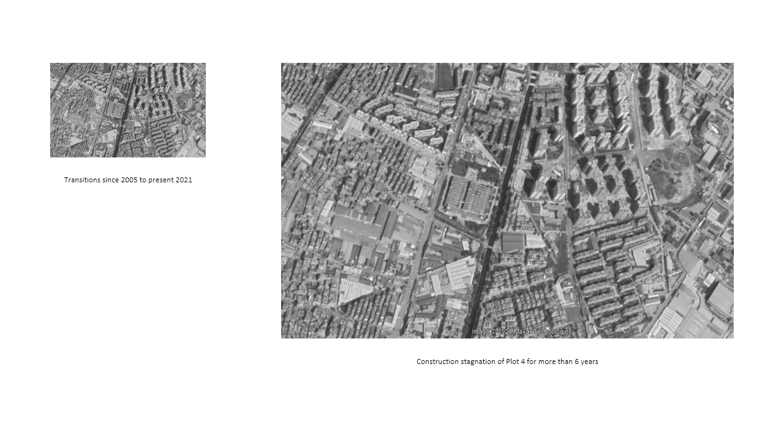The construction has stopped since 2015, and the towers remain the same. A dream had turned into a nightmare. The unfortunate stagnation of construction resulted with this building staying in an unfinished state for 6 long years, until in 2020 a number of desperate house owners decided to move into the unfinished floors and start living. And this unexpected situation created stories to tell. With 100 people came 100 stories.

These unfortunate people have spent in some cases all of their life capital savings into acquiring a small unit in the towers, only to be living like an urban gypsy. Without the basic amenities such as electricity, water or gas, they have adapted their way of living into a series of community-based actions.

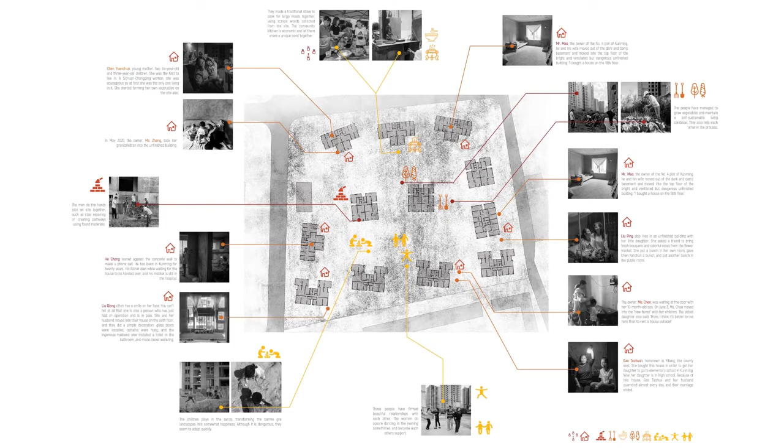As we look deep into their way of clustering together, we see bonds forming among the residents by creating an unexpected family. They have unintentionally morphed into a collective living organism where each individual is taking a part in the communal activities. This was a crucial part of my research as I looked into their way of clustering together. There was vegetable farming on the site.

The men were doing repairing and construction of the staircases or pathways. They were having community meals together and cooking in the community kitchen together. They were collecting water from the nearby resources, the children playing on the site, the women square dancing in their leisure evenings, and finally, the festivities happening inside the site. All of this created this atmosphere of collective organism in the Kunming Happy City project.

So the question was how to intervene in an unfinished site with an already built community like this. I looked back to the roots of Chinese vernacular architecture. All throughout China, there are several traditional housing styles, but most of them follow the courtyard concept, including the Yunnan province where Kunming City is. The Siheyuan is a typical courtyard house concept, but I was immensely amazed by the way Tulou house people lived in this corridor-connected circular typology.

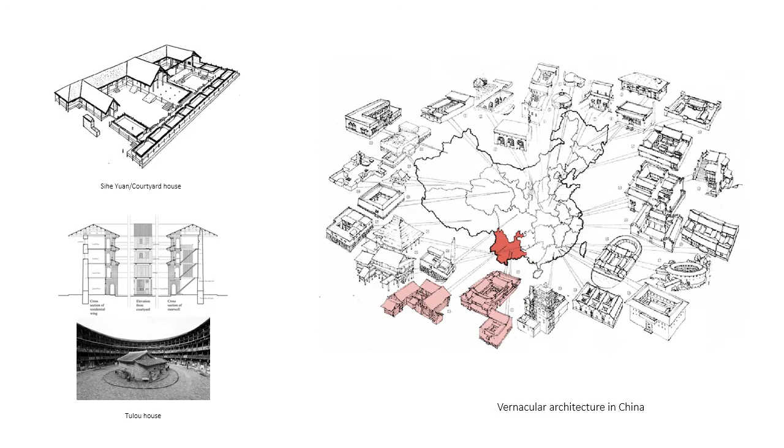Although these people have separate apartment units, they are weaved together through a corridor surrounding a shared intimate courtyard in different levels. I was thoroughly impressed by Wang Shu and his practice of critical regionalism in the modern-day architectural practice in China. The critical regionalism emphasizes the importance of place by considering contextual elements like scenery, historical references, and light without falling into imitation and traditionalism.

The name of their practice, Amateur Architecture Studio, signals this commitment to learning from the amateur builder, focusing on a craft skill, such as the Wapan technique in the Ningbo Museum, and applying this to contemporary architecture. Combining this traditional knowledge with experimental building techniques and intensive research, Amateur Architecture Studio responds with a site-specific architecture that valorizes craft and skill over professional knowledge and expertise.

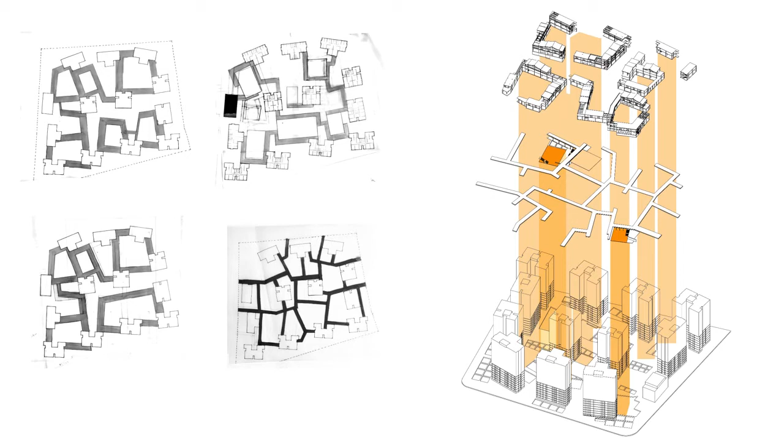These inspirations brought me to the intervention of courts intertwined with the housing towers of the Kunming Happy City. As I tried to interconnect the tower blocks with the courtyards, I stumbled upon the idea of having a crossover with the pathways and the courtyard blocks. Thus having a situation like this, where the courtyard volumes are integrating within the towers and enclosing the tower blocks in a different urban fabric.

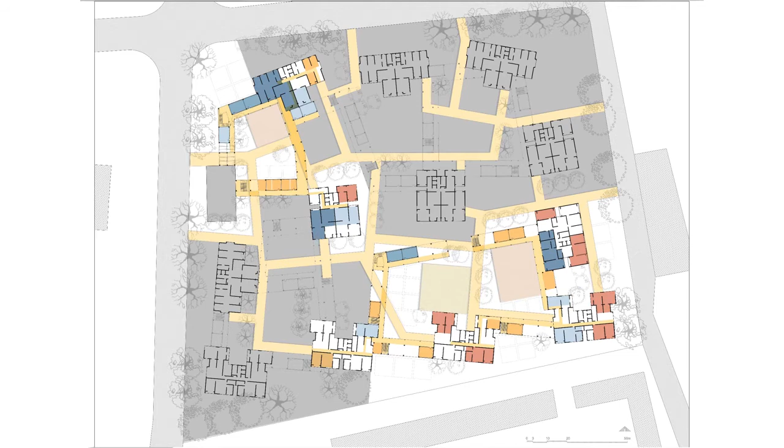The first phase would be the pathways connecting the towers in an almost unplanned way, creating deliberate accidents or coincidences. The courts will also be built in phases. The first few phases would be just the towers where most of the families are living in the first 3 floors. So what happens when all the courts with different textures are there? It creates a different urban fabric in the Kunming Happy City with different textures of farmlands, grass, pathways, and courts in different levels.

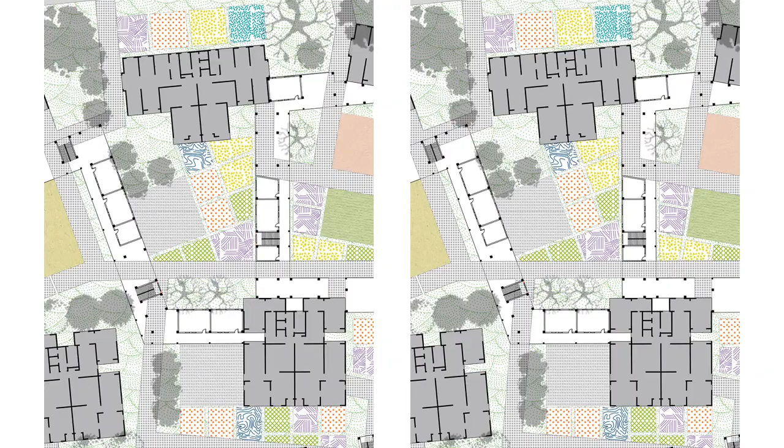All these textures only enhance the quality of the urban fabric in the Kunming Happy City and promote the collective living environment in between the towers. All these courts will have different functional aspects surrounded by the flexible framework of volumes. These could be occupied and reappropriated by the people according to their need, thus encouraging participation throughout the phases. It will also break the monotonous repetition of the towers, as they don't have any kind of connection with the ground.

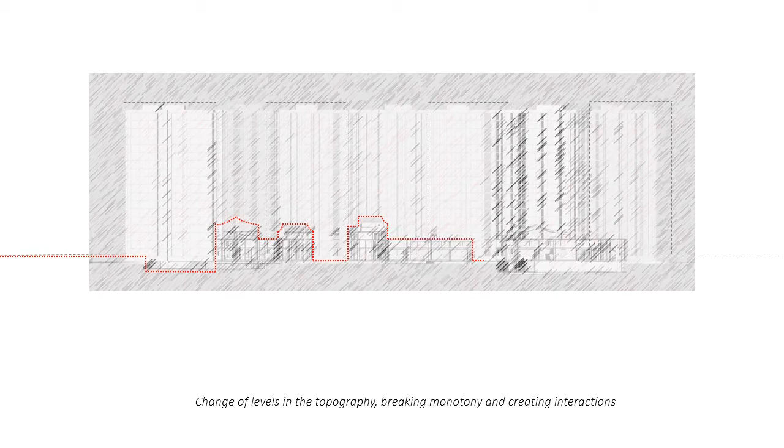Thus, the topographical changes created by the court volumes have spaces connected with the ground in different levels, and so in the layers integrating within the towers, breaking the monotony. The section rejuvenates the interaction and connection within the ground and different levels of towers and the courtyard volumes. So what will be the driving force to keep on living here?

The unfinished towers, even when not suitable to live, were used by the inhabitants skillfully. They all showed tremendous courage in the face of adversity and took upon the challenge to make it their home. The framework of courtyard volumes interlocking the tower blocks together weaves into a more integrated and interactive space for the inhabitants. The way of collective living is reintroduced in the context with layers of spaces connected through the earth.

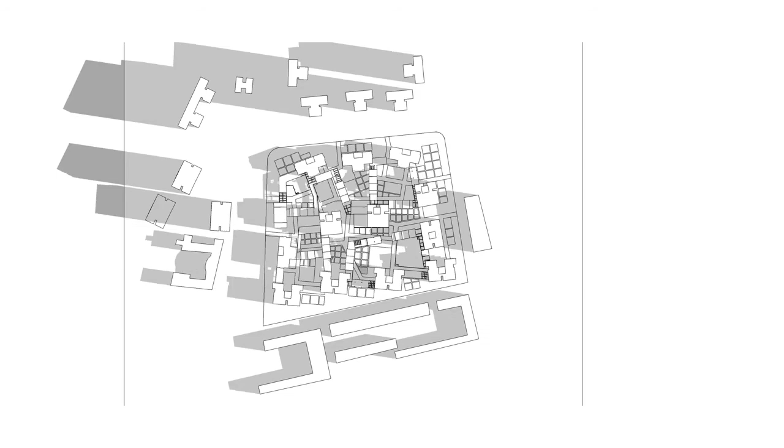These are the people who came from all over China, from different walks of life, and the environment within the courtyard will only enhance their sense of belongingness to the context. This will be the driving force to live here, as they now have a future to look forward to, where the towers may integrate into a vertical community in the future.

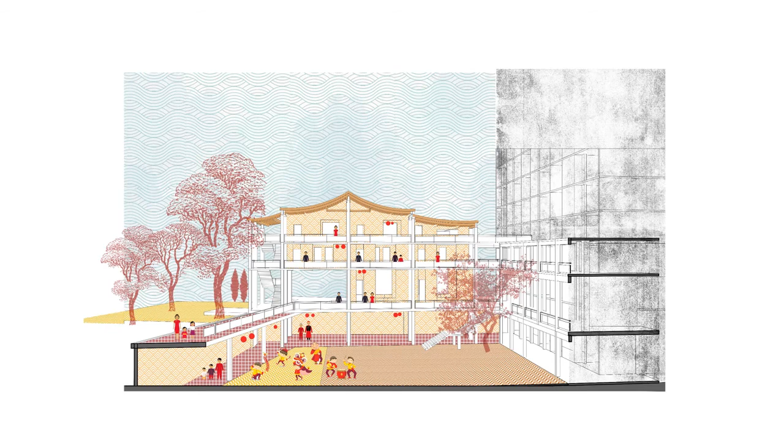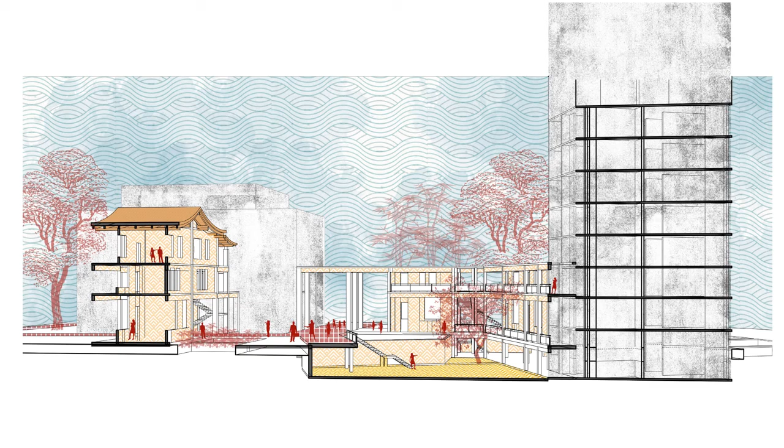As a starter, as a principle, as a frame to work on, a framework with which to start and in which to work above and below, a structure in which to design, think, and work in a co-creative way by those who matter in the context of the Kunming yet not happy city, a project in which the architect cannot continue alone, a project in which a situation is designed far from a final project.

It is conceived as a succession of courtyards that in turn connect with the unfinished towers, which offer the towers an urban context, an urban development that gives place to the towers, that can give an identity to all that raw concrete, towards a truly happy city.